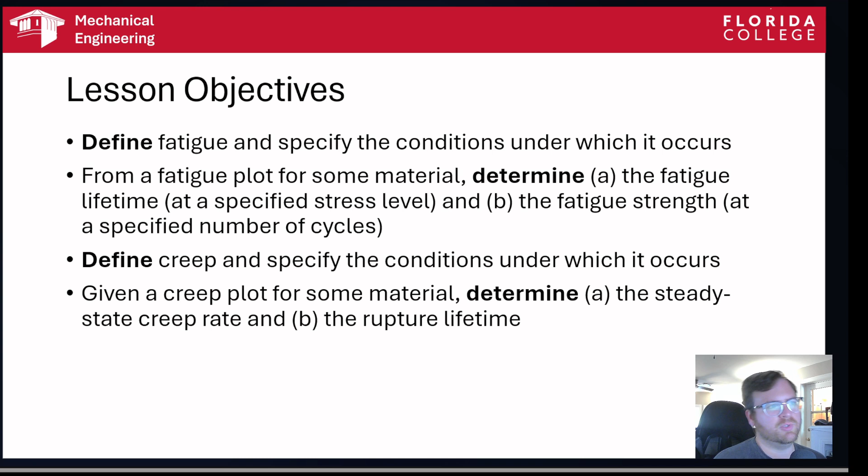We're going to define creep and specify conditions under which it occurs. And given a creep plot for some material, we're going to determine the steady state creep rate and the rupture lifetime. And we're going to get into the lesson, but first, movie time. Not blackboard time, movie time.

No danger, of course, once we're in the air. Well, that's okay. If you keep a man standing by the lever here on both taking off and landing, so nobody catches the coat or anything. Right, I'll see to that. What are you doing here? Captain, I just have to... Well, now that you're here, I want you to listen. I've told the inspector here all that you told me. Now, if you've anything to add, I want to hear it now, and I want him to hear it. No, sir, I don't have anything to add.

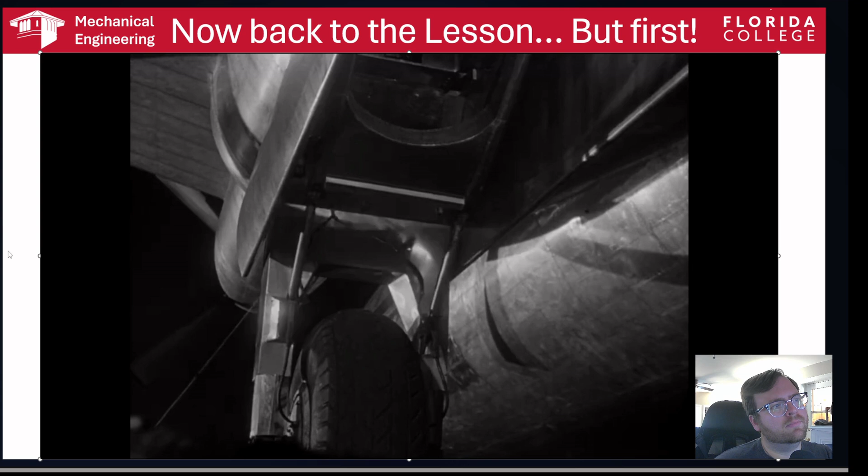Okay, so this is the movie No Highway in the Sky from 1951. And the only reason I know that this movie exists is because my father is a huge movie buff, and every Saturday morning was black and white movies all the time. And one time I was actually in college, but I happened to be home, having coffee, and Dad was watching a movie. And I realized that it had a direct parallel to something that I was learning in class. And that is this movie.

So my question here is, what would drive this man to destroy an aircraft by raising the landing gear while it was landed? Is he insane? Well, maybe a little bit. But he also said mathematics is a very exact science. And he mentioned that there's a whole bunch of people in danger on this plane. So something that he knew that nobody else on this aircraft knew about drove him to destroy the aircraft so it couldn't fly any longer.

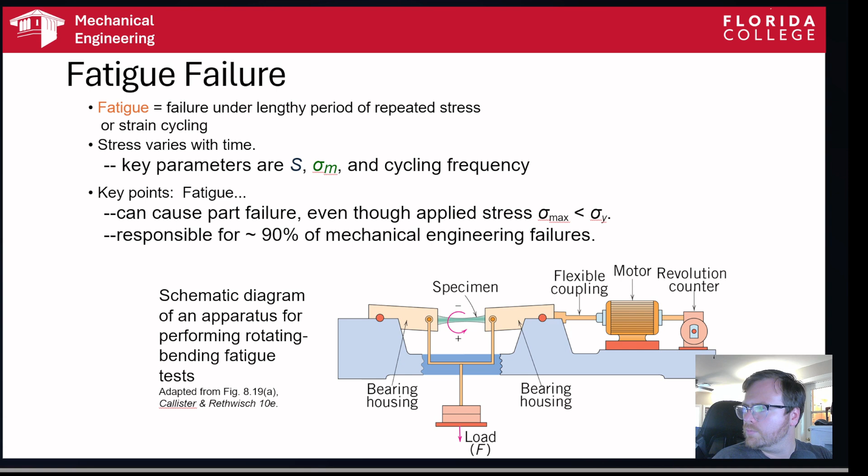So I am going to be writing on the board a little bit this lecture. This is actually the only board that I have for this lecture. So we're going to start with cyclic stresses.

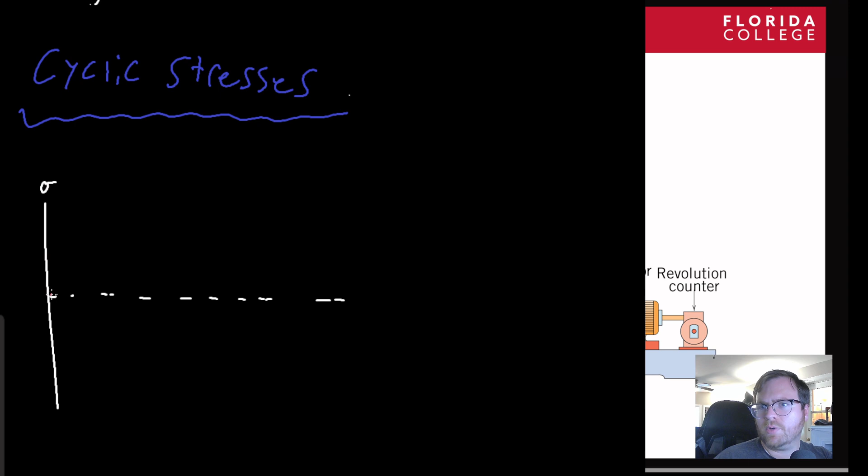Okay. And basically, when we're trying to induce fatigue failure, or when a fatigue failure occurs, what's going on is, let's say this is my stress axis, and then we're going to draw the 0 mark right here. Okay. And what's happening is stress is being applied kind of like this. So we're going to start out with a sine wave pattern.

And this position would be sigma max. Sigma m, which is our mean stress. Sigma m is going to be equal to sigma max plus sigma min divided by 2. So that would be this line here, with this position being sigma min.

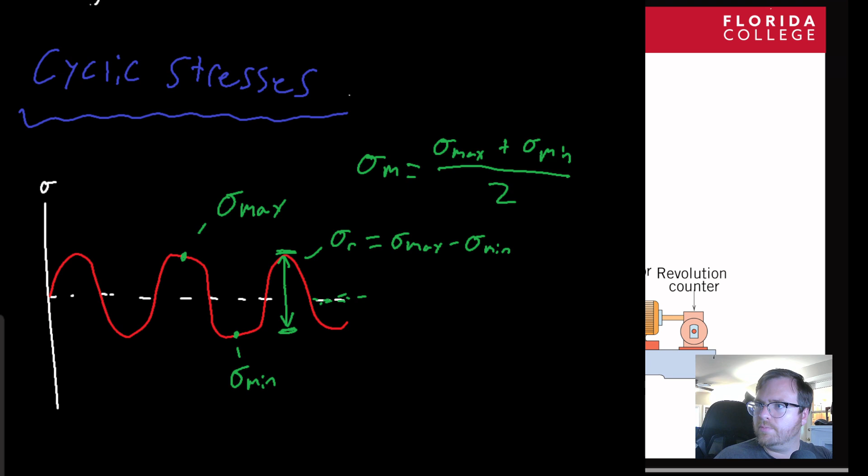We have a range to keep in mind. So the distance between this position and this position would be sigma r, which is just equal to sigma max minus sigma min. And then finally we have the amplitude. And the amplitude, S, will just equal sigma A, which is equal to our sigma r over 2. Another way to write this is just sigma max minus sigma min divided by 2. Okay?

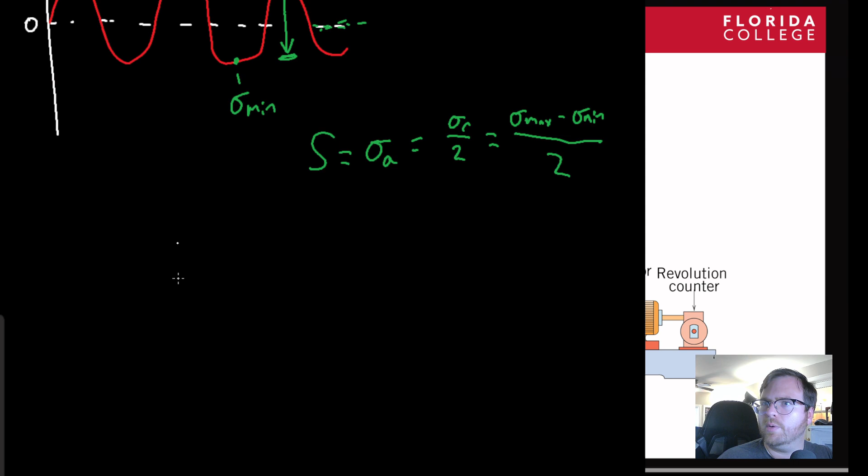And then obviously the distance between this point and this point would be your frequency f, right? And that can have an effect as well. Not necessarily so much for our calculations, but it will have an effect for vibrations, because if your frequency of loading is close to the harmonic frequency of the object that you're looking at, it can cause it to actually increase the amplitude of vibration over time, and that can cause failure. So, like outright failure, not just fatigue failure.

But fatigue failure is just the straight loading pattern, and we'll call this point up here sigma y. Okay, so we're well below our yield stress, right? Maximum doesn't even get too close to sigma y, and yet at this stress, we're saying that fatigue failure can occur. So it's something you have to keep in mind when you're designing things.

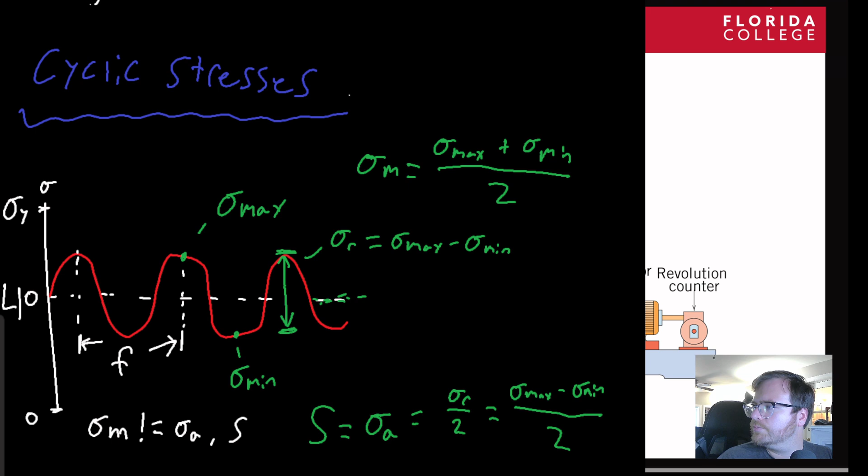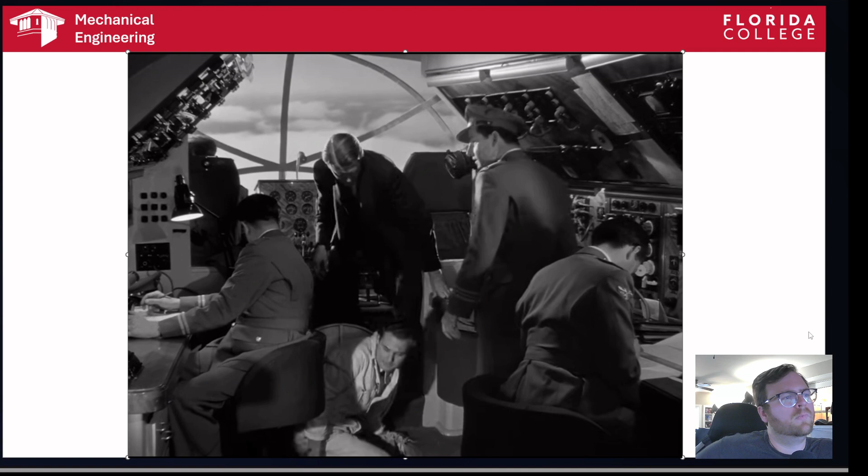Now, mind ahead, sir. Find it, Meg? Yep. Fuses keep blowing on the undercarriage safety circuit. Here we have the radar screen, sir. Radio altimeter, radio compass, DF loop. Excuse me. DRC repeater, which is duplicated on the pilot's panel just in case. Oh, yes. Well, I don't suppose many things go wrong these days. Almost never. We never use reconditioned engines on this line. We get new ones every 600 hours. They're pretty things. Oh, they're really obsolete, though. They're good enough for me. This is the third set. Have me out of a job if they don't kick up a little something soon. Oh, well, I wouldn't think that would happen.

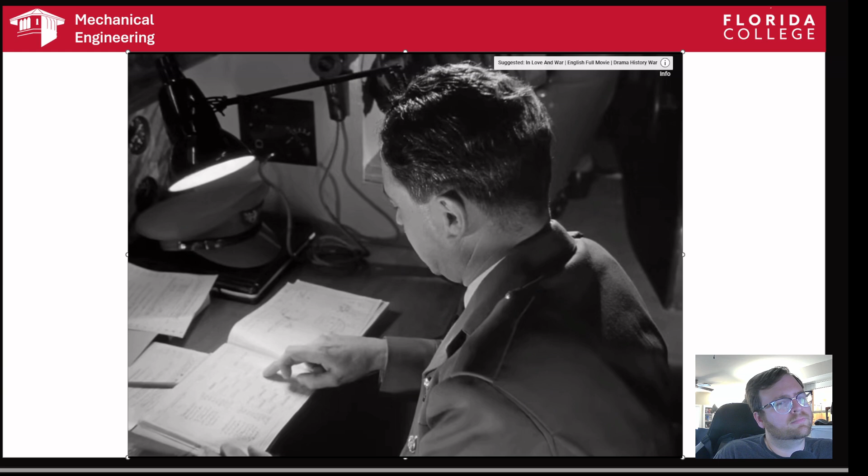Did you say the third set? That's right. But I thought the reindeers were new on this run. They are on this run. But this was one of the first two built, and the builders wanted some experience with the ship before turning the fleet over to this line. So we were loaned out for a while on the South American run. Well, for how long? Quite a while. Well, could you tell me exactly how many hours this airplane has flown? Certainly. It's right here. 1,422 up to takeoff. Anything else, sir? No. We have dual ADF indicators.

Okay, so what's going on here? Well, this guy, played by Jimmy Stewart, is actually an engineer, and he works in a laboratory, and he's investigating this new thing that can actually cause airplanes to fall out of the sky for no apparent reason. The tail of the aircraft keeps falling off of the specific design of plane, and nobody really knows why. We'll continue a little bit with the movie.

Well, did you learn all about airplanes? Mr. Dodson, I must speak to the captain at once. Captain Sanderson is very busy, Mr. Honey. If there's something I can do. Mr. Dodson, please tell the captain I have every reason to believe this airplane's in very serious danger, and I insist on speaking to him, please. I'll see what I can do.

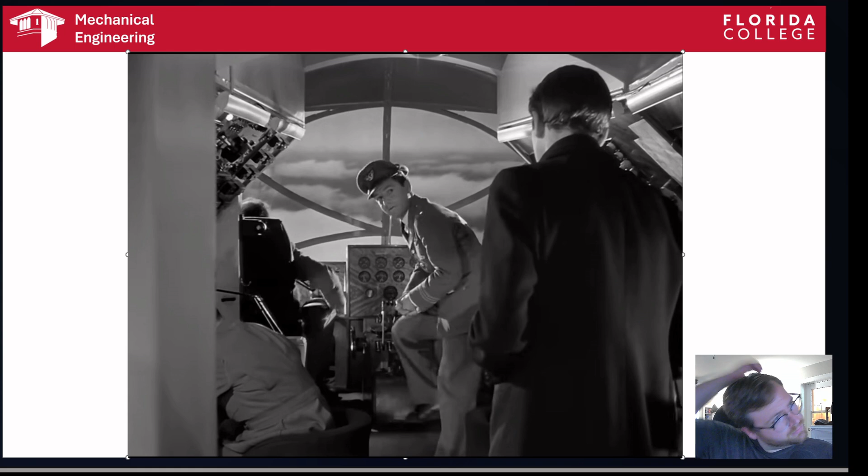Well, Mr. Honey, what's all this about? I understand you're not very happy about something. Captain, this airplane and everybody in it is in very serious danger, and you must turn back at once. What sort of danger? Captain, I've been working on a theory on nuclear fission. I used the tailplane of a reindeer as a basis. According to my calculations, it'll fail in 1,440 hours.

Now, I see, but now this is a theory. Now, I assure you I've done a great deal of work on this, Captain. This airplane has flown 1,422 hours as of takeoff. The tailplane can fail at any moment. Mr. Honey, I don't believe you realize the very strict procedures under which an airline operates. But have you ever heard of an airworthiness certificate?

So essentially, the captain of the airplane, he's not going to do anything about what this engineer is talking about. He's never heard of anything called fatigue failure. Of course, they haven't even termed it this. In fact, he mentioned that it was based on a theory of nuclear fusion, which is really funny. But it's the idea that back in these days, they didn't really know anything about fatigue or why

it occurred, because a lot of the advances that have been made in material science have really been since World War II. And this movie was 1951, so we're really on the tail end. This movie came out 6 years after the end of World War II, right? And so fatigue failure was not a very well-known concept back in these days. And so none of the pilots have any idea what he's talking about, and most other aircraft manufacturers have no idea what he's talking about.

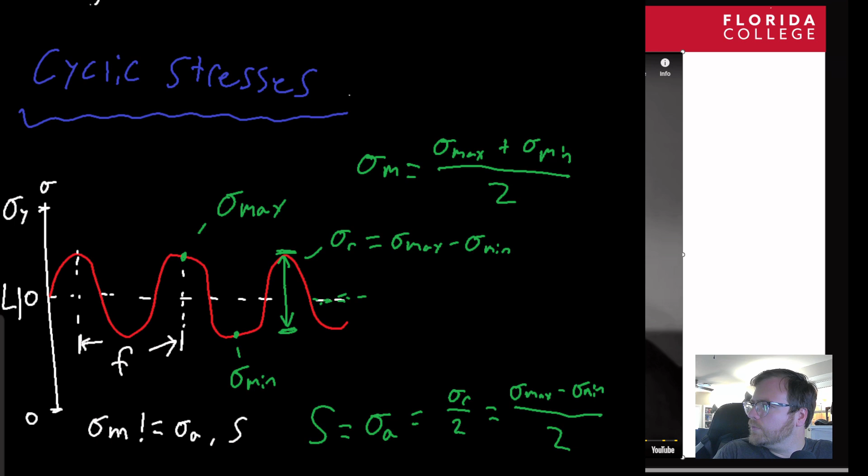And yet these airplanes are falling out of the sky. And he's worked it out, and he said that after 1,440 hours, these planes should fail, right? And how can he do that? Well, he can come in and he can say, well, I know that this one wave is a cycle. That's what we call one cycle. I know what the frequency of that is, which is the amount of time it takes to go through one cycle. This could be anywhere from 50 milliseconds to a second, right, depending on how wide your frequency is.

And he's worked it out in terms of number of cycles. How many times does it cycle in the air? Now, again, that's another thing I haven't mentioned, but when the plane's flying through the air, the tail here in this case, but also the wings and other things, are vibrating because of wind flutter. Okay, that's another thing that has been improved on in modern aircraft. There's a lot less flutter, and so a lot less of this happens, but this still does happen when you're flying through the air.

If you want to see that, when you're driving in a car and you stick your hand out the window and just tilt it up or down, you can actually feel a little bit of that flutter. Okay, especially if you orient your fingers in a certain way. Okay, so that's what he's worked out.

And what he has found is that these planes are operating at an unsafe stress amplitude, and that over a long enough period of time, after a certain number of cycles, they will hit failure. And he's worked out the number of cycles, or how long it takes each cycle to go through, and that total time of flight to failure is 1,440 hours. To me, for this to be in a movie is amazing and unbelievable, and I wish that we had movies like this today. And so, of course, if we're going to watch a movie, we got to see the end of it.

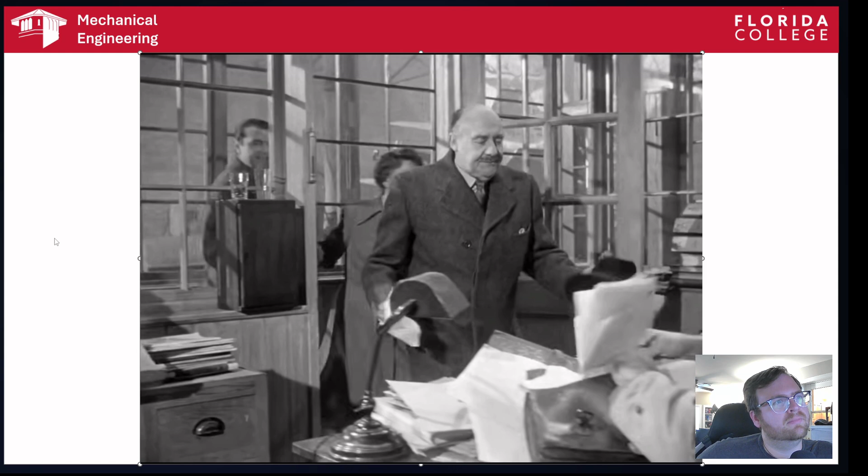Sir John, I've had the most incredible piece of information. You haven't heard mine. They've just made the first test flight on our plane at Gander after it was repaired. It made a perfect landing on the airport, and the tail collapsed while it was taxiing to the hangar. I could hardly believe it. Mr. Honey, we've received 2 messages from Labrador and Gander which bear you out completely. Oh, well, that's good. You know, I can't see where I could have gone wrong in this. I've worked it out through 3 different channels. Didn't you hear me? I said...

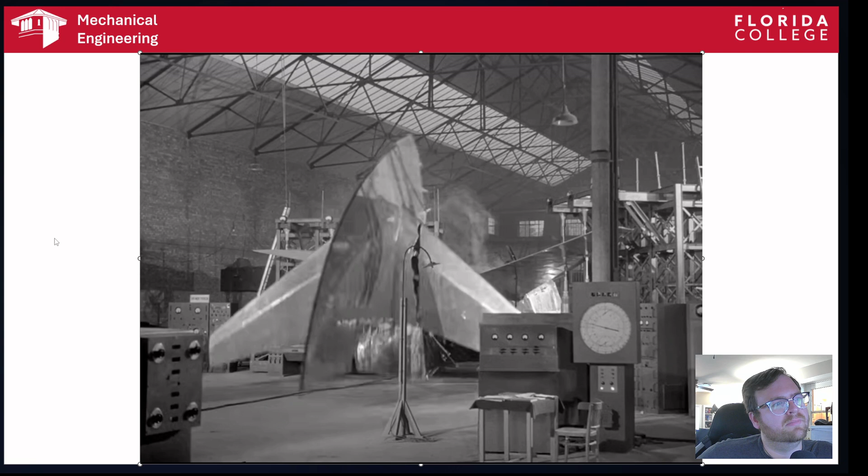Temperature, that's it. That's a variable factor, isn't it? That plane in Gander had been flying in the tropics. This test is in an unheated shed. It would have collapsed on schedule if I'd raised the temperature 40 degrees.

And so the actual reality of what he's looking into bears out well compared to what he's telling everybody is actually happening, right? It's hard to see in this. I'd like to rewind a little bit to see if we can actually see a little bit of his test setup. This is actually really realistic. I mean, they probably went to an actual material science testing center, like an actual lab, to shoot this movie. Because this is a highly realistic looking laboratory for the day.

And let's see if we can catch the actual setup. Aha, yes, here it is. Okay, so you have a control station here, actually 2 control stations, and you have knobs and dials and indicators, and these are connected to... I mean, a movie director would not be able to come up with this. They had to pull an actual engineer to talk about this.

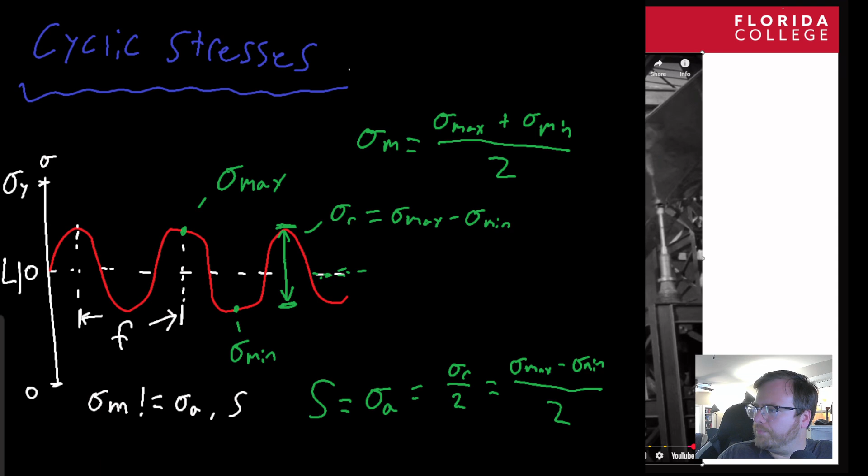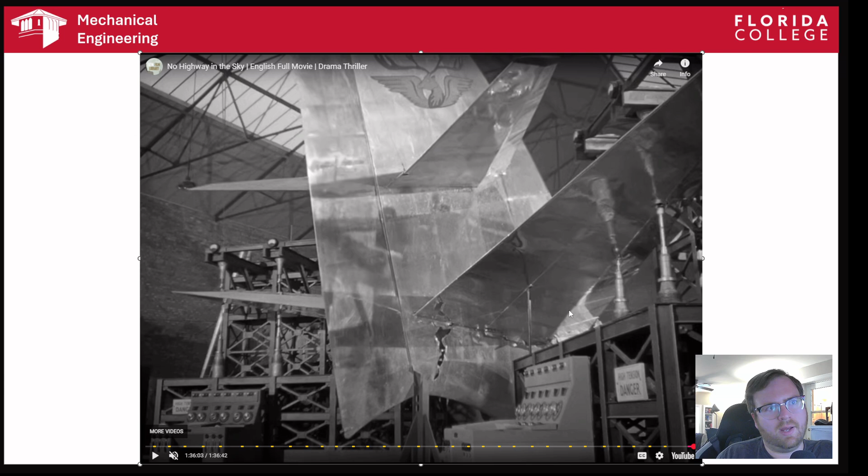Okay, so just a very cool movie. Every time I talk about fatigue failure, I always love to stop and take a look at this movie, because it's a really phenomenal movie. I highly recommend it. Jimmy Stewart's a good actor, and that is 1951's No Highway in the Sky.

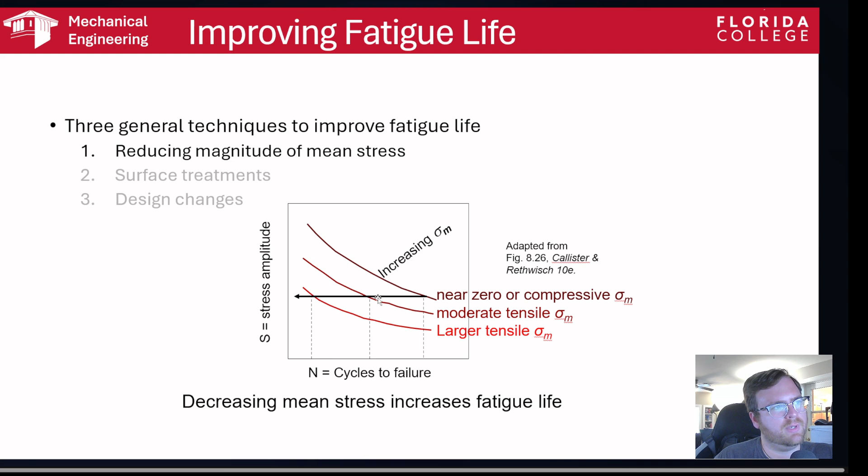With a moderate tensile mean stress, that failure curve goes lower here, and then with a larger tensile stress, it's all the way here at the bottom. Which means that your stress amplitude has to drop even farther below for us to exist in this range, right? So if we're near a 0 mean stress, then we're actually getting into kind of a safer region, because we can exist in this range, right? It's kind of hard to see with this graph. But basically, the idea is just stick below your stress of fatigue failure, right? Or your stress amplitude that will be above fatigue failure.

Also, if you're in this curve, if you're for aluminum, by lowering your stress amplitude, you actually give it a longer period of time before failure will occur. Even though it will someday, you're giving it a much longer period of time. Imagine if you're working on bicycle spokes, something will fail first before the bicycle spokes fail if they have 1 billion cycles before failure, right?

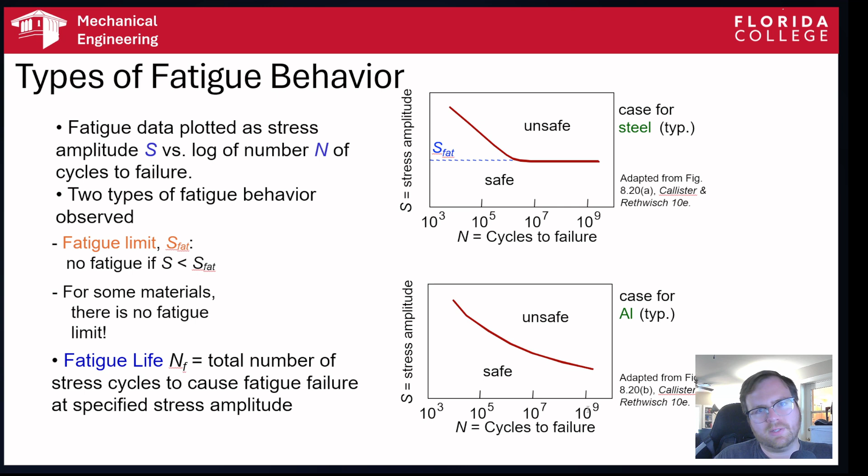So the second strategy we can use is surface treatments. We can actually impose compressive surface stresses, these are called residual stresses, onto the surface of a material to increase the surface hardness, okay? What this does is actually suppress surface cracks from growing. So if we have a crack on the top, if we put that into a compressive mode, it's trying to squeeze together the cracks instead of allowing them to open up. You have 2 main methods of doing this.

One is called shot peening. I don't know if you've ever seen a shot peen before, but it looks like a hammer. And the hammer has a rounded edge, okay? And all you do is you take a piece of metal and you just tap it with the shot peening, and you create little indentations, and that little tiny indentation will create the kind of compressive stresses we're looking for. Okay, that's one very practical thing that you can do easily, right? You just buy a little hammer and you hit it enough times, and it'll create this nice kind of... You can tell shot peened materials when you see them.

Okay, and then also the second method is actually carburization, and we've talked about that before. I've shown you a gear that has been carburized, and we saw the cross section of it. We talked about diffusion, right, and how you can use diffusion to create different material properties. But yeah, you carburize carbon-rich gas into a piece of material, especially steel. And that will actually create a surface layer that is much harder than the inside of the material. And that will help keep cracks from forming on the outer edge, right?

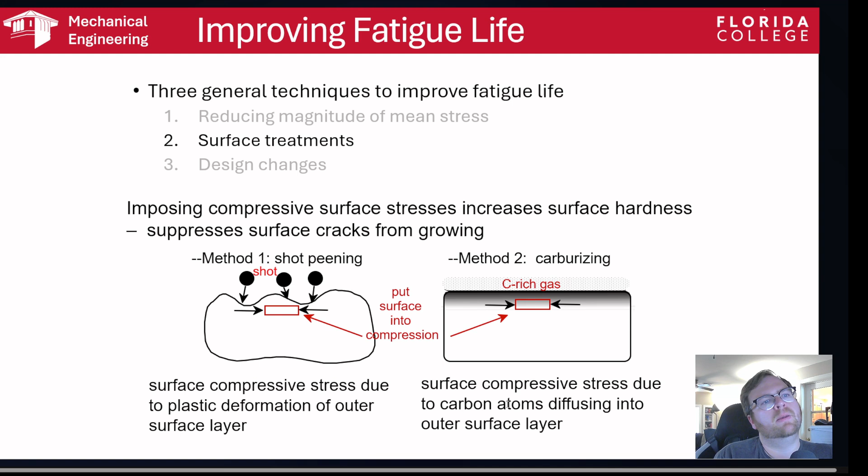Finally, we can use design changes to increase our fatigue life. Mainly what we're talking about when we say design changes is we remove stress concentrations, right? You could actually make your material thicker. That will improve your fatigue life. So if you have this width here, if you increase that, that lowers the stress on the material because it's thicker now. It has a larger area across which the stress acts. So you lower your stress amplitude that way.

But also if you have obvious stress concentrations, deal with them. Don't allow these sharp edges to exist. Instead, design them with little fillets in mind, and that will much improve your system as far as fatigue life is concerned, and also just generally. It's just general good practice among all engineers that you never leave sharp corners like this. Of course, we're not talking about these outer sharp corners like here. We're talking about the inner ones where they connect to other material.

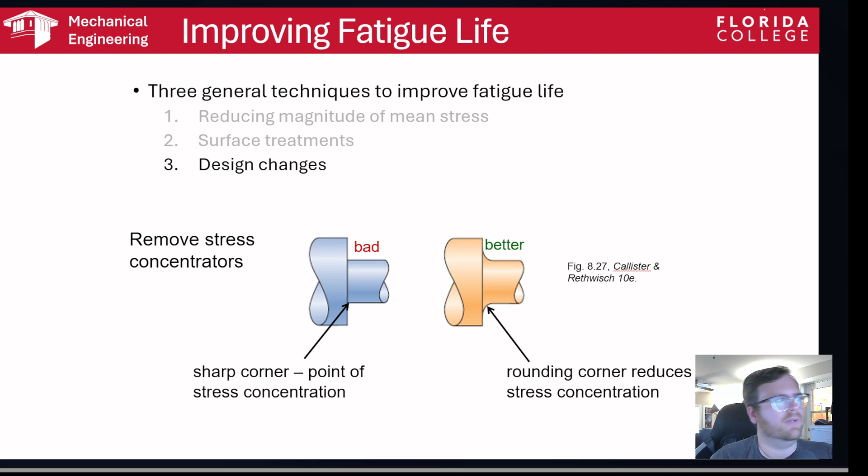Okay, so that is fatigue failure. So now we're going to move into creep. What is creep? I've mentioned it several times without ever explaining it. At the University of South Carolina, there's actually a whole creep lab that I know of, and that's all they study. It's a very interesting problem to have.

But basically, if you put a material under a constant stress, so instead of our fatigue failure where we have an oscillating stress, we now have a constant stress level. If we put our material under a constant stress, and usually if we apply enough heat as well, over a really long period of time, your material will slowly, ever so slowly, stretch and stretch and stretch before it finally ruptures, okay?

These regions are subdivided into three different regions. You have primary creep, which is the initial onset of creep. You have secondary creep, which is also referred to sometimes as steady state creep, where you have a linear curve of your strain to time, okay? And then finally you have tertiary creep, where you actually have necking beginning to occur. So it's a lot like a tensile test, except it's happening below your yield stress and over a really long period of time. This could be years, right?

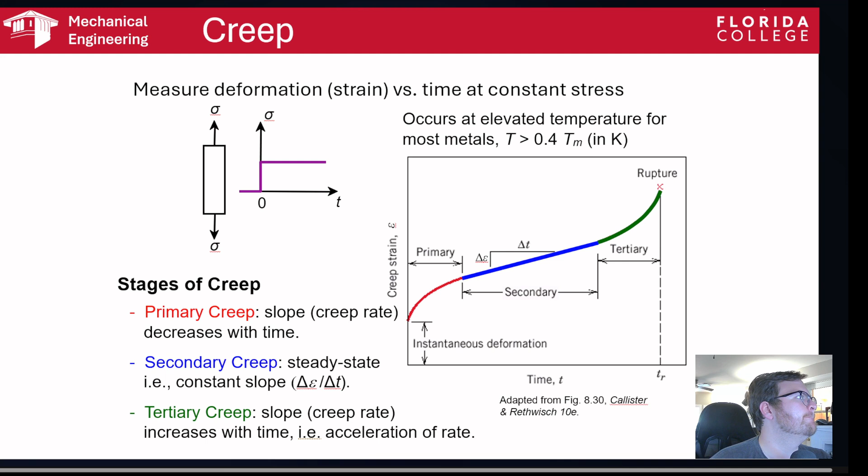Okay, so here's just an idea of what happens when we're creeping at different temperatures. At less than 0.4 times the melting temperature, we don't have creep occurring. We just have elastic deformation, if any, right? Then as we grow in temperature, we have a higher curve that has a shorter time frame, below infinity. As we increase the temperature or stress more, this curve gets steeper and we rupture faster. And then again, even steeper and faster in the highest temperature or stress scenario.

Steady state creep rate, or epsilon dot s, with subscript s for steady state, epsilon being strain and the dot being rate, increases with increasing temperature and stress. The rupture lifetime, t_r, here, will decrease with increasing temperature and stress.

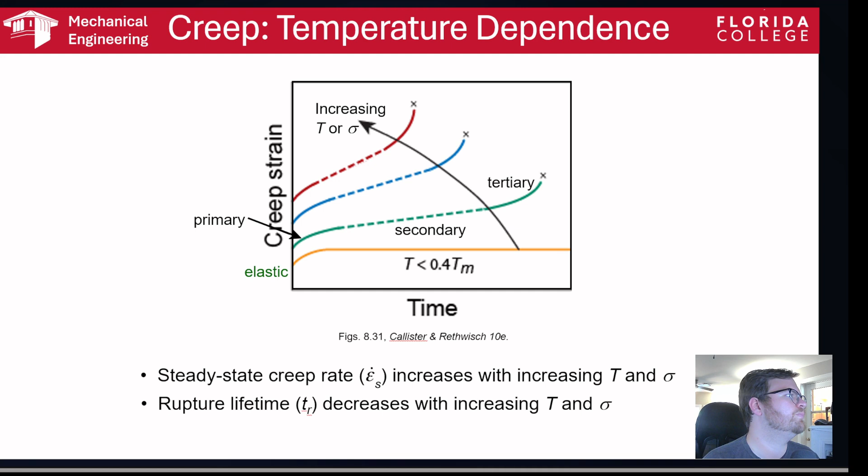Okay, so what I have here is an equation for steady state creep rate. It is equal to a material constant, K2, multiplied by our stress to the power of n. That power of n is called a stress exponent, which is a material parameter, multiplied by the exponent of negative QC, which we've seen something very similar to this actually before. QC here is the activation energy for creep, which is a material parameter, divided by RT, where R is our gas constant.

Okay, so our steady state creep rate is actually constant for constant temperature and stress, and so strain hardening is balanced by recovery, and there's a dependence of steady state creep rate on our temperature and stress. So we've already covered these things.

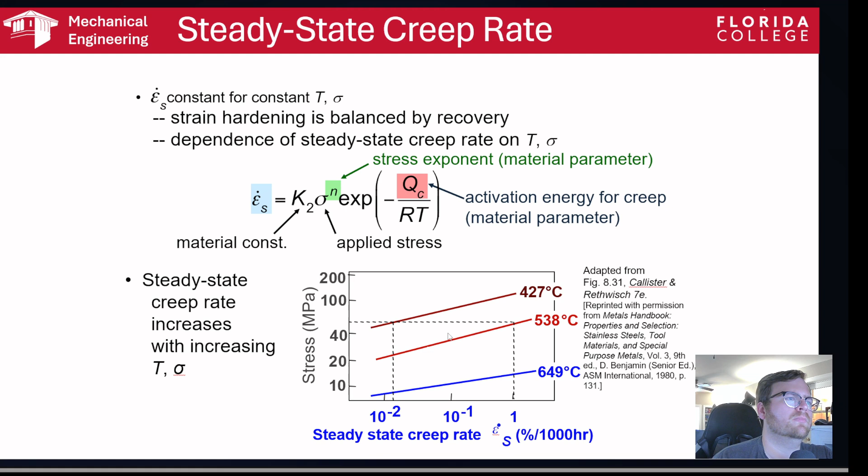Okay, there's a lot on this slide, so I apologize for the kind of confusion. The biggest thing to take away from this is this equation, because it will help you calculate what the steady state creep rate is. And what does that even mean? Well, steady state creep rate is just how long does it take for it to slowly stretch over time. Like in 45 days, we might have gone from here to there, right? Okay.

Okay, so we can also predict, and this is very important for engineers' purposes, the creep rupture lifetime, okay? So that time to rupture TR, we want to know when that is, right? Because we don't want somebody to be flying on this plane when that happens. Creep data for a prolonged period of time is impractical to collect in the lab. So we can actually extrapolate it from data collected for a shorter time at higher temperature. So that's what the lab at USC that I was talking about does.

They actually put objects under stress in a giant heated chamber, and that causes this creep to occur at a faster rate. But you can use the Larson-Miller parameter M to adjust the temperature that you're looking at now to the temperature that you expect it to actually be at. And that is your temperature multiplied by a constant, normally approximately equal to 20. So this could be a material-dependent constant. There's a lot of these kind of arbitrary material-dependent constants that you have to deal with. Plus the logarithm of time to failure. And that is all equal to our M, okay?

So what we do is we start with some temperature. Let's say I know temperature 1 and I know the time to failure for 1, that is equal to some M, the Larson-Miller parameter. And then I say, okay, at the temperature I'm actually going to use this at, I know M already. What is TR? And then based on the material I'm talking about, I choose C.

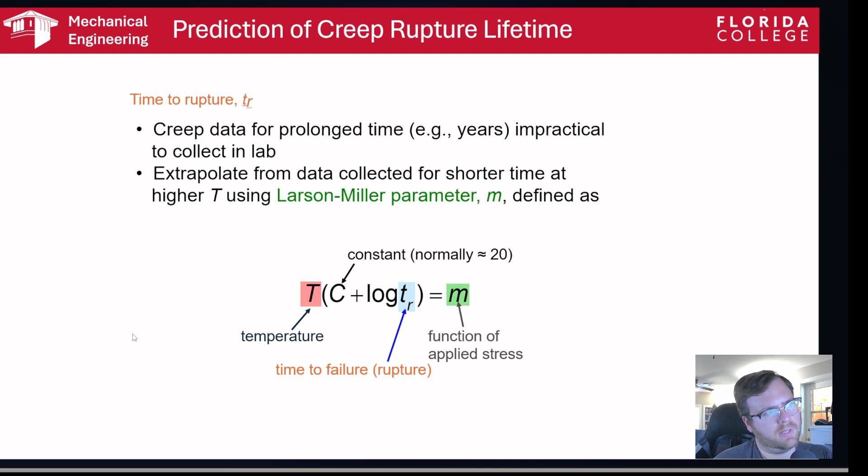It's 800 degrees Celsius, so we put 1073 in here in this position. Why is that? Well, because Kelvin is 273 plus whatever your Celsius temperature is. 800 plus 273 equals 1073 Kelvin. Then we choose 20 for our constant, and then plus the logarithm of TR. And then if we solve for this TR, we get 233 hours, okay?